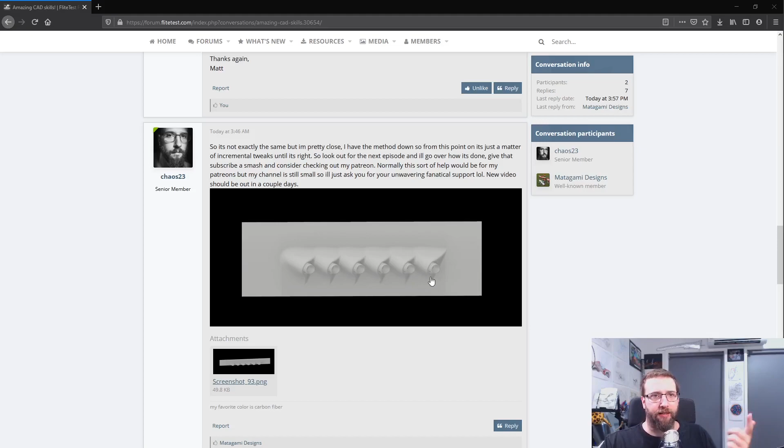Well, I wrote back to Matt, and I think I confused him. Well, he got 75% of it, so that was helpful. So I did some stuff and showed him how to go about it. It's not perfect, I can still see a number of things I still didn't even get right, but it was enough that he got it. Pretty close, it's the same as mine. It's not perfect, but it is a lot better than his first attempt, and that looks amazing. So, awesome work, Matt. That's fantastic.

So let's have a look at how we work out the shape of something from a picture, because it's not easy, and quite often the pictures we have aren't perfect for figuring out what we want. So how is it that you look at something and work out its shape? I haven't really explained much about this process. I've done lots of just showing you me getting dimensions of stuff, and that's easy enough. You just put the image there, you draw a line with the dimension on a thing that you know the dimension of, and then go from there.

You only use the dimensions of certain things in the image that are in the same plane of perspective and aren't parallaxed or lens blurred and stuff. Yeah, there's a lot to it, but it's pretty simple. But I haven't talked about finding shape, how to find geometry, how to find curves, how to work out and then take what you see and create a method for creating a shape in CAD.

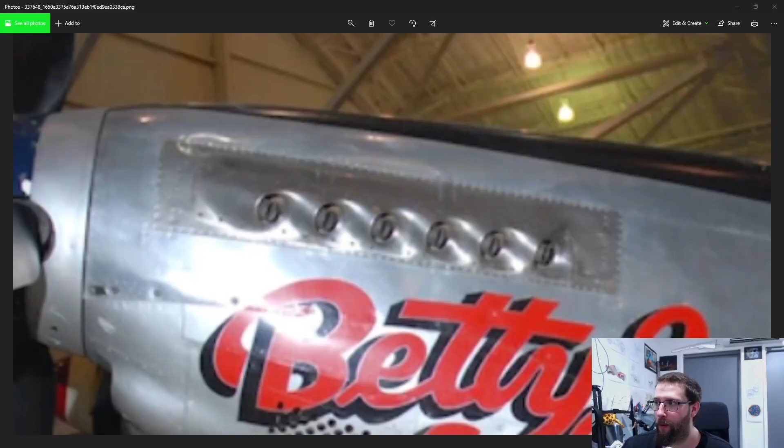CAD design, computer-aided design, is all about orders of operation. It's all about the method you use to approach the shape to get to what you want. And it's a big puzzle game, a bit like working out puzzles, and I love it. So I'm going to go through that with you and show you how I went about figuring out how to make that shape for Matt. Okie dokie, so let's have a look at this now.

When we want to find the shape of something, we need to look at certain identifiers, certain markers in an image that allow us to determine shape. The key things our brains look for when determining shape is light: how light plays off the object, where shadows fall, where highlights are, where things contrast. This delineates in our mind outlines and form, and from that our brain develops the three-dimensional geometry of those markers. So when we look at an image, even when it's blurry and zoomed in like this, we can still see quite a bit of information. We know from the rest of the shape of the aircraft that it's pretty flat.

We're looking straight on from it. There's very little play in the light, but we are seeing little spots of highlighted light from the lighting in the scene. So we know that the object we're looking at is fairly shiny, right? This is all simple stuff. But what shape is it?

Because this is all pretty flat and the color and the highlights don't appear much, we know that this is a pretty soft curve, a pretty flat face. It's not entirely flat because we can see the way that there are some lines up here, which means that it curves a bit more.

When lights play off of a curved surface, they generally make a line. When it's a cylindrical surface, it's a line. When it's a spherical surface where it has compound curves in two directions, it's usually a spot or a point, or you get a bit of a fuzzy little area, depending on the shininess of the material or the shape of the curve. How intense the curve is determines how fine the point is. The finer the point, the sharper the curve.

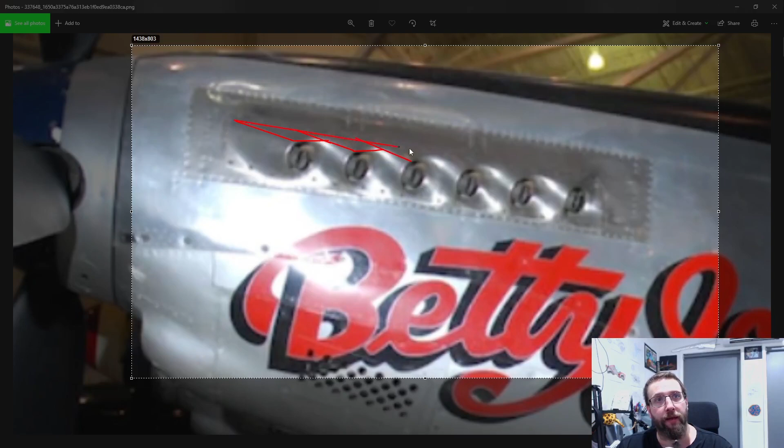So if we infer that that line continues, we can follow that line to the back, and then same to this one. We can follow from the front here, the apex of the curve, to here. We can then draw a line that tells us that there should be a delineation between this surface here on the tops of these pipes and the surface that meets and blends with the rest of the aircraft.

Other things that we can tell is that the same sort of thing is going on here. This crux of the corner in here, there seems to be - it's not quite a straight line, but you can infer that that's pretty much a straight line, which is a combination of the curve, the outside curve of this pipe here, and the inside curve of the opening here, which creates an S shape.

So from that, we can say, okay, one of these things is created with a repeating geometry of this sort of shape, this sort of like yin and yang, but with the fat ends touching, if that makes any sense. So this is the profile of the shape that we want. We don't really want the pipe as he had in his first attempt.

So now that we have the profile of this geometry, we then jump into Inventor. In Inventor, we need to get a few things set up.

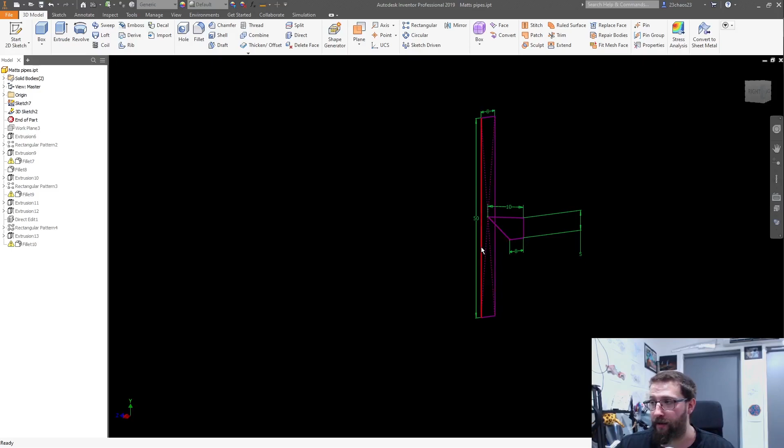First things first, we're going to create a sketch that's going to give us the surface of the aircraft. I've just made it a flat surface. The actual aircraft probably has a bit of a curve there, but to keep things simple, I just made a rectangle shape so that we can have a surface to play the aircraft, the pipes out of.

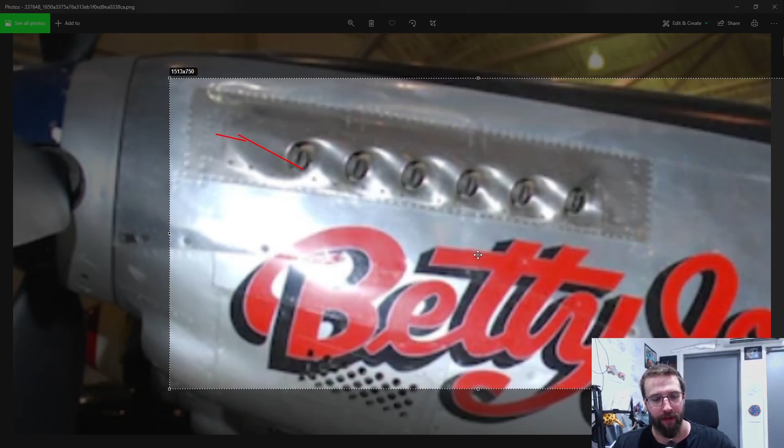Next thing we need to know is the angle that the pipes are coming out of it. If we look at those pipes, they are both coming out of the aircraft. This is one of the terms that Matt had some trouble with. I'm going to give you guys a bit of geometry jargon here.

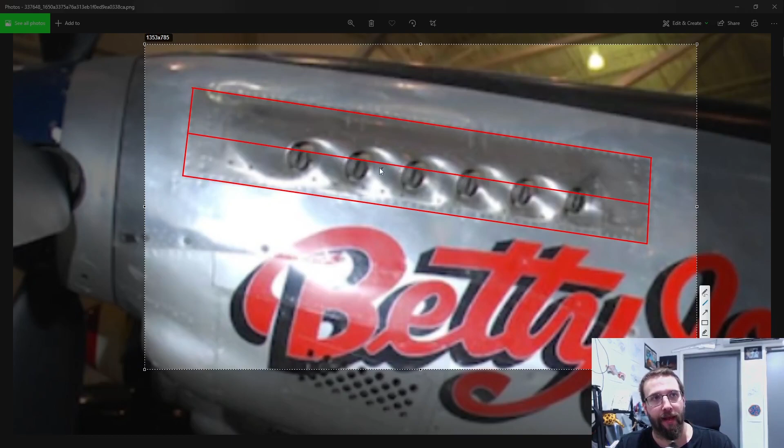If we say that this surface of the aircraft, this panel, if we draw a line down the middle of this, this line is called the longitudinal bisector. It's longitudinal because it runs the length of the rectangle, and it is a bisector because it cuts this section in half. Bisector.

So we can see that these pipes come down, and obviously they come out from the face of the aircraft. But we can see that this is actually a very shallow angle, and it's also because the length of this shape from where it sticks out to where it blends with the aircraft is quite long. We know that the angle at which it comes out from this bisector is also quite shallow. So it's a shallow down and a shallow out.

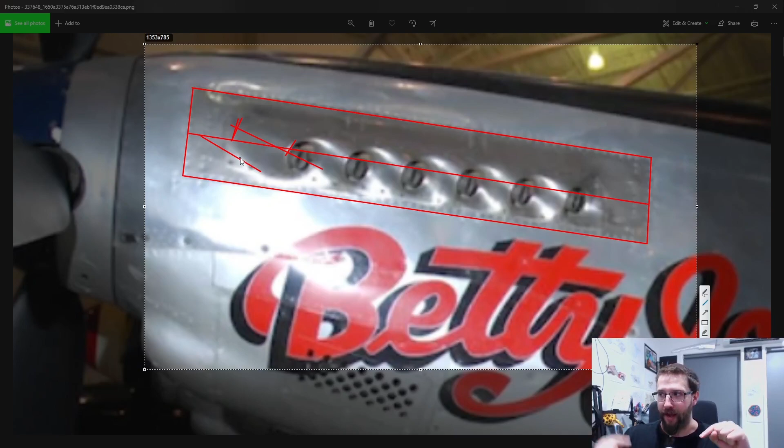So from that, I just created a quick three-dimensional sketch. And here it is. You can see it sticking off the center of this rectangle. So we have the distance that this angle is coming away from the surface, the distance it's going down, and the distance that it's coming out.

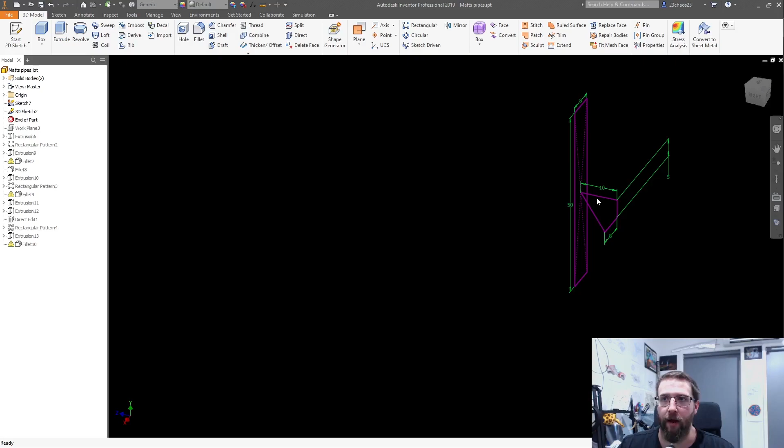You can do this with angles instead. I just did it with this because in 3D sketches it's easier to use the distances in the 3 directions rather than setting up the angular arc seconds for each of the lines in the 3 different planes of orientation. It gets confusing when you're using 3D sketches.

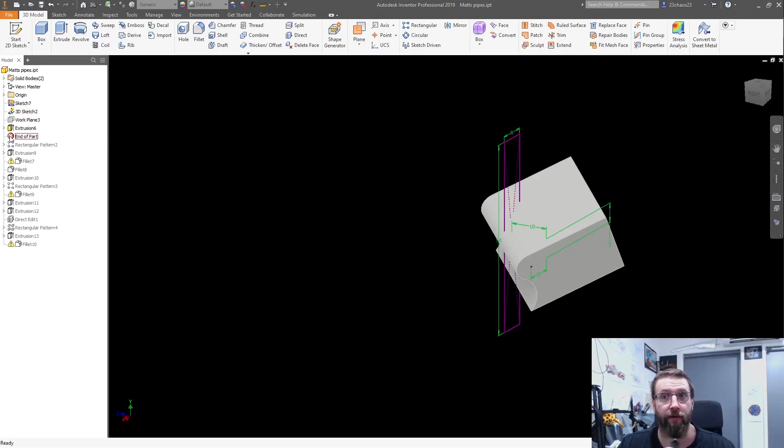Once you've got that, the next step is to create that shape. So you can see here I extended it going in further than I needed it, and you've got the outside curve of the pipe and the inside curve of the pipe.

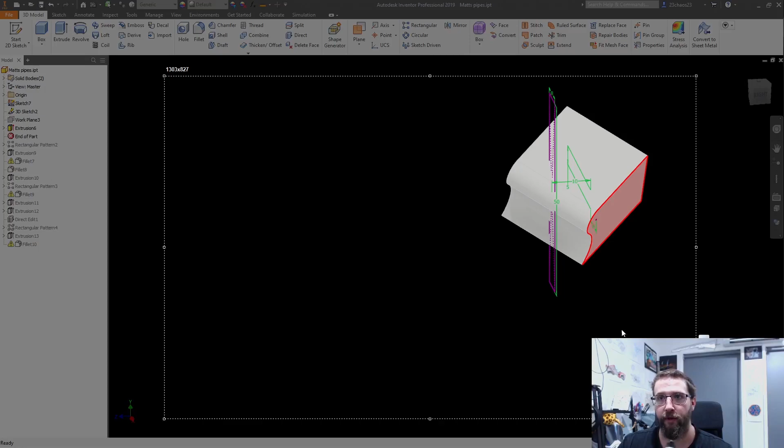Now you'll see that I've created it at a weird angle compared. It's not coming straight down with this rectangle, it's the other way. And this is because when you repeat this geometry along this axis, you want them to overlap in a certain way so that these faces meet.

So the thing that you're trying to match up is not this line here, this axis of this geometry with the face of this geometry you're going to create, but you want to line up this corner here with this corner here along the z-axis in this case.

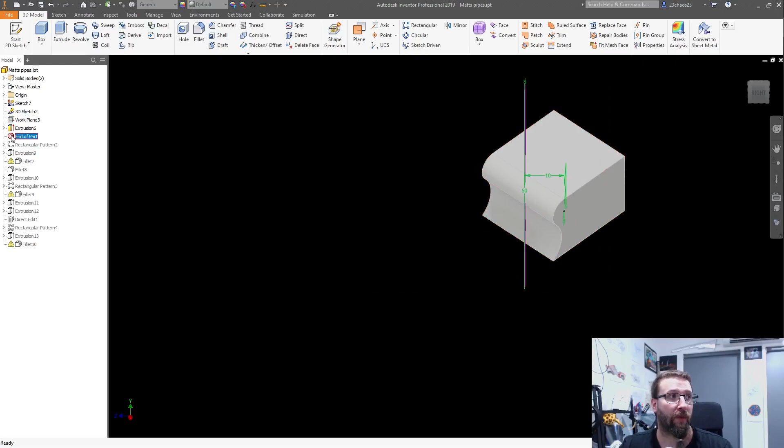Next up, you repeat your geometry and you see there how that makes now a nice flat plane. And then carrying on, creating the square, then we just use your fillet functions. Mine are broken because I was fiddling with it a bit more. But along down the ways, you get to a point where you end up with what you want.

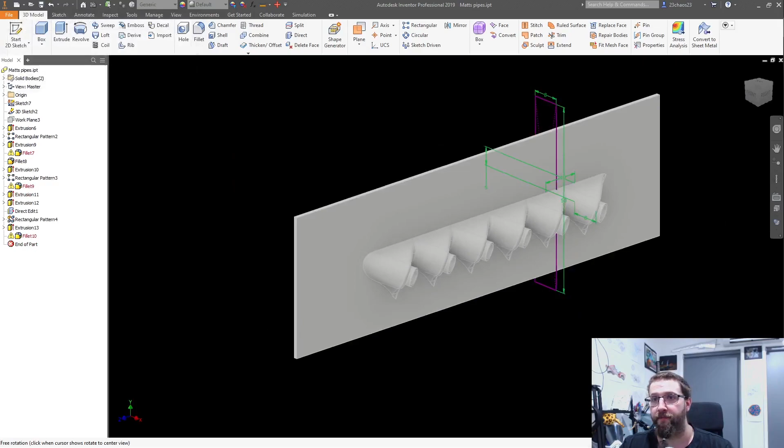And there it is. It's really simple. It's just a matter of looking at the shape that you want, figuring out, okay, how do I make this? And that comes down to, like I said, you look at the image and you need to work out your cross-sectional profiles of your shapes.

And that turned out to be that weird double teardrop, yin and yang smushed together sort of S-curve shape. There are some things that are still not quite exactly right, because if you follow this S-curve, it comes down and meets up with the geometry of the aircraft, and then it looks like it comes and scoops into it. Whereas what both of us have done, there is no scoop there.

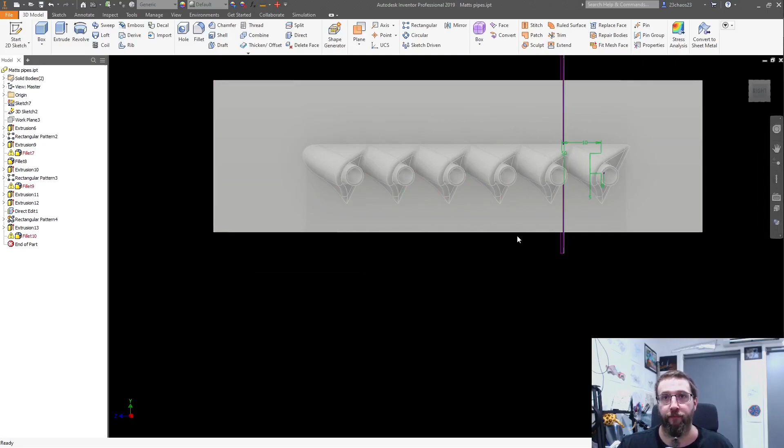That S-curve comes and it meets up at the back here rather than at the front here. So to make this better, I would bring this face further out, and then you create another piece of geometry that was like the one that we created to create this repeated geometry, but you do a negative of it flipped around so that it ends up creating a scoop out here, just a very small one on each one of these profiles, and I think just a little bit on this one.

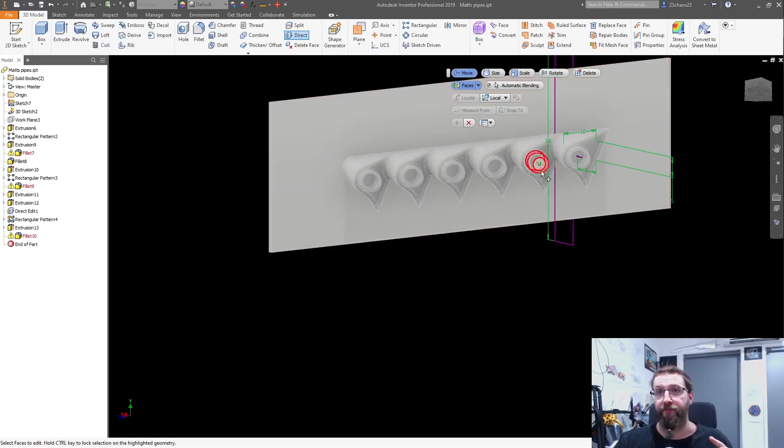This one and this one, the ones on the ends, are a bit different to the repeated geometry in the middle because they're the ends, so their geometry changes slightly and becomes the exception to the geometry you're trying to create. If I wasn't being lazy and just trying to do this quickly, I would have created a repeated geometry for these center four in the middle, and the ones on the end I would have created in a similar way but slightly different, so the one blends to the end on that side, and the other blends to that one on that side.

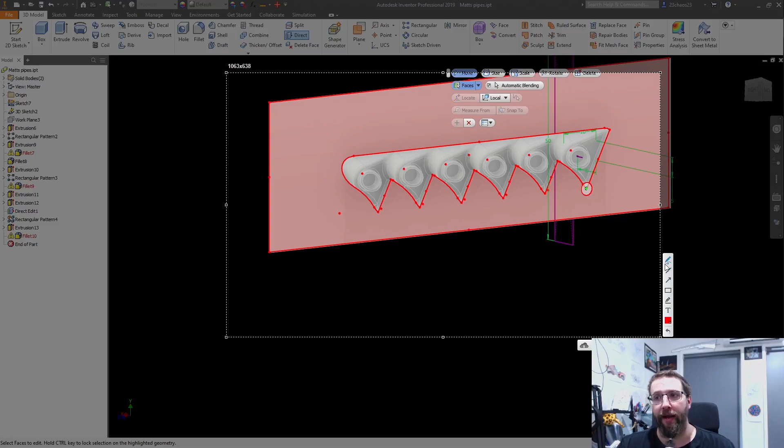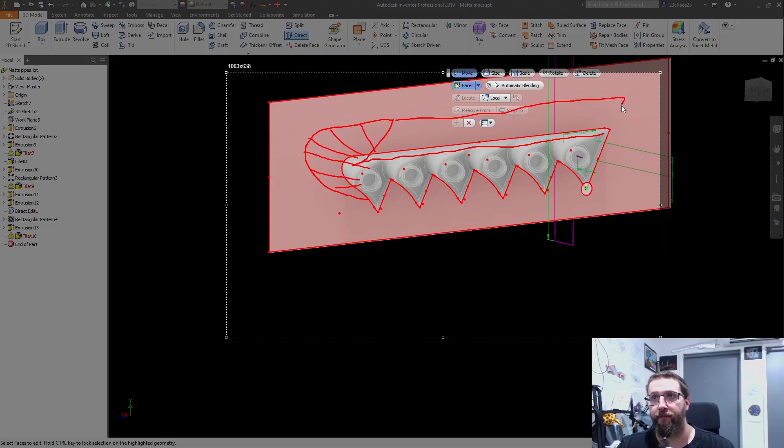Because if we look at the image, there was more of a blend coming off this back one, where it sloped more up like this, and the curve it created was sort of like that shape. We're missing this profile that was on it, and it would have continued like so to that point there, with a fillet that made that sort of shape. That's what we're missing.

So the method to create this is on the right track, this is the right way to go about it. It all depends on how much time and effort you want to spend making tweaks and adjustments and fine details to tune it in so it's exactly right. And this is good enough. For FDM printing, the amount of detail you lose pretty much means this is your maximum level of detail. There's not much point going further than this, because you're going to lose detail in the manufacturing process anyway, so you're wasting your time.

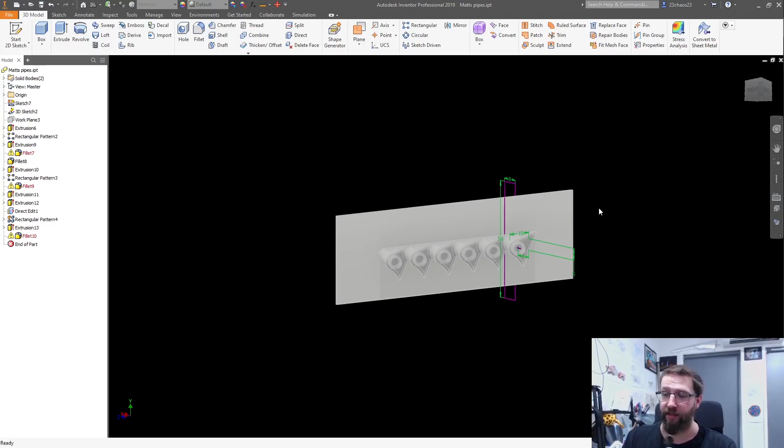And there you have it. It's not the best explanation in the world because I'm trying to keep things general. There are so many exceptions to rules, so many other little nuances to this kind of skill that I can't really get across in any reasonable video. It's something you learn over years of practice and trying things. Hopefully that was helpful, and it lets you look at your reference imagery and develop your shapes and geometry better. This will improve the look of your models.

Keep in mind, whenever you're doing something, lay out your design criteria at the beginning, your parameters. You have to look at what your manufacturing process is, and what the limitations of your design parameters are. That way you're not wasting time putting extra fine detail into something only for it to not show up, or end up adversely affecting the surface finish of your product.

With FDM printing, it's a win-lose situation. You get to be a bit more lazy, you don't have to put as much detail in because there's only a certain limitation on the detail you can print. In my case, I'm using a resin printer, so I kind of have to go full balls with that detail. I don't get to say that's the limit of the manufacturing process - no, it'll do 5 microns, so that means rivets, screw heads, everything, I'm going to have to do it. It's going to drive me crazy. Yeah, so hopefully that was helpful.

Before I go, let's jump into Inventor again and I'll show you where I'm at with the Draco build. I've gone quite a bit further, so let's go have a look at that. Oh yeah, this turkey's got some legs now. Isn't that cool? Let's just go over some things I've noticed in getting these legs done.

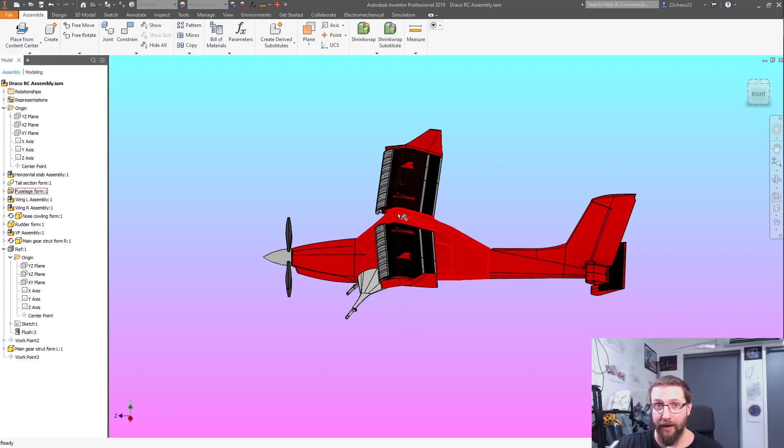Things I'm not happy with, which will ultimately lead to me redoing 90% of what you see - minus the wings, the wings are cool, I'm happy with the wings, the elevator's cool. Things I still need to change.

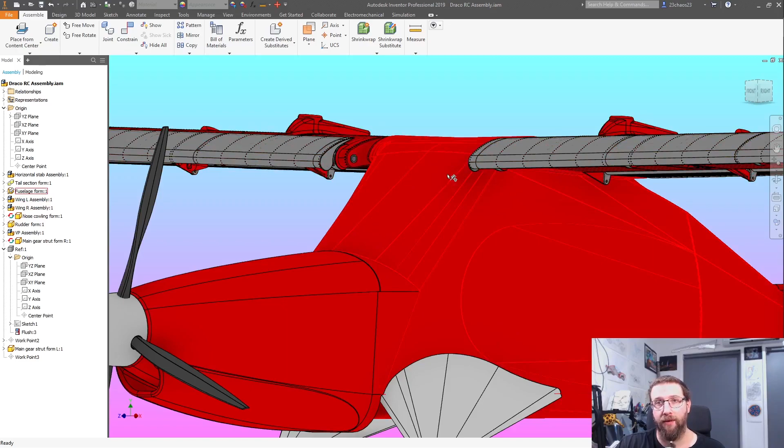Well, if you look at it head on, she's a bit skinny, and I think there's a couple of things that play into this. I think it comes down to the dimensions I got for the height of the windshield - raising the front end up here to where the wings meet is a little too high, I think it needs to come down maybe half a thickness of the wing. Another thing playing into it is the lower end of the front cowling.

I think I have it coming a little too far down, scooping out here at the bottom, because it does this in the real aircraft.

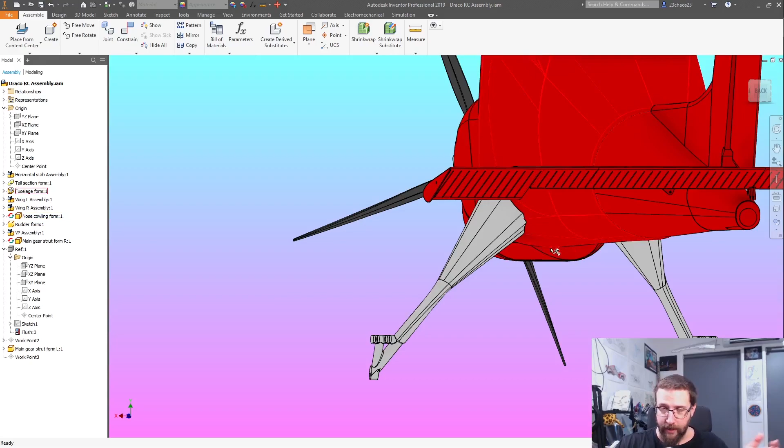This is the venting zone for the engine area, not the exhaust, just the cooling vent, so a number of radiators and stuff were in here, and this is where the airflow would have exhausted out. The cowling in general is pretty close.

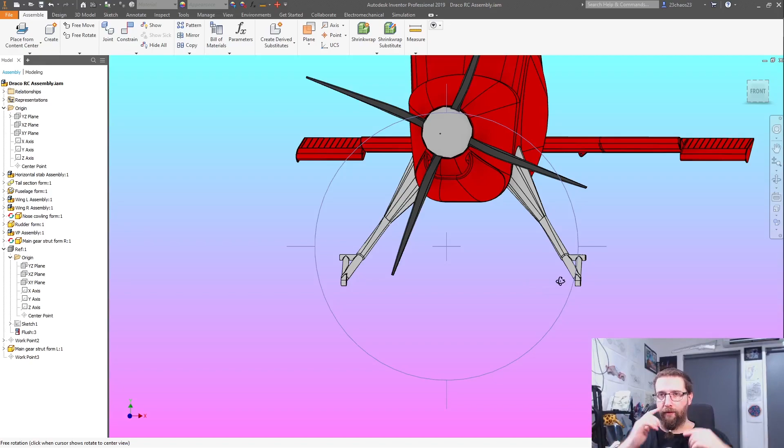I'm not 100% happy with it. There are things that could be done differently. The legs are pretty close, but I don't think I have them spread out as much as they should be, and I think this is due in part to how narrow it looks with the longer windshield, so it's throwing me off on how they should look.

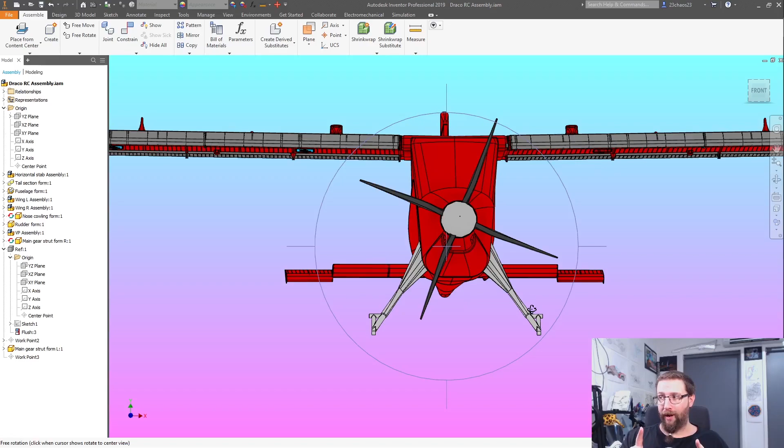Also, the reference imagery I have for this is mostly from before he did the suspension, and I think it widened out just a little bit after the suspension upgrade. I'm not 100% sure, but from the measurements I can pull off certain drawings, there was about a 5% increase in the distance between here and here. So I'm not 100% sure.

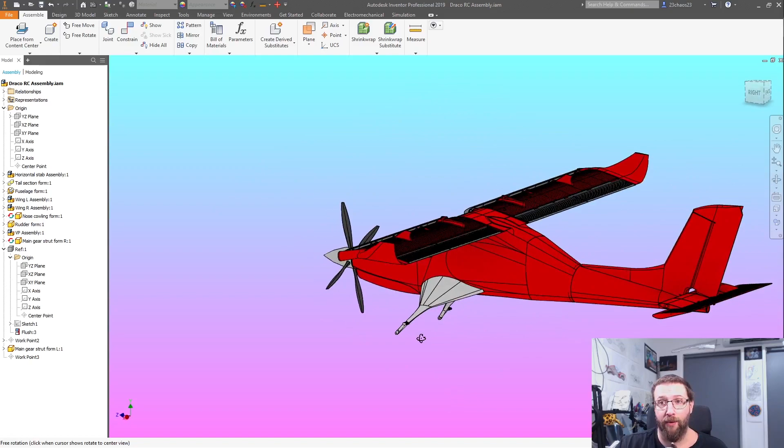But she has legs now, and it's starting to really look like the Draco. I'm quite happy with it. It's getting there. I'm going to keep tweaking and playing with these fuselage sections.

The tail I still have to come in on. Oh, by the way, I made the rudder. Hi, rudder. So I still need to change the shape of the vertical stabilizer for the rudder so that they blend together.

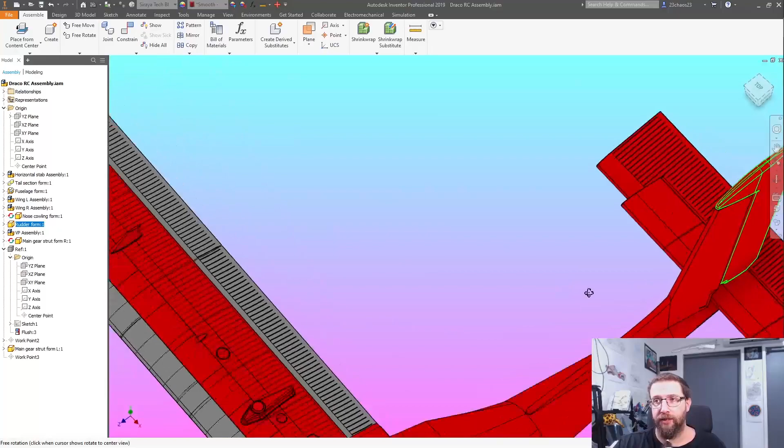I adjusted the thickness of that curve, so now it looks a lot closer, but I need to create a sloping curve from the front edge to that so it all has a nice aerofoil shape, because at the moment that's a flat surface, and that's not what we want.

I've got to make a heap of tweaks to the main fuselage shape. I'm going to change a whole bunch of stuff, which means I'll have to change this and this too because they all blend to it, and these objects are created from this object, so changing this means these aren't going to fit anymore, and I'll have to do it again. It's just going to drive me mad.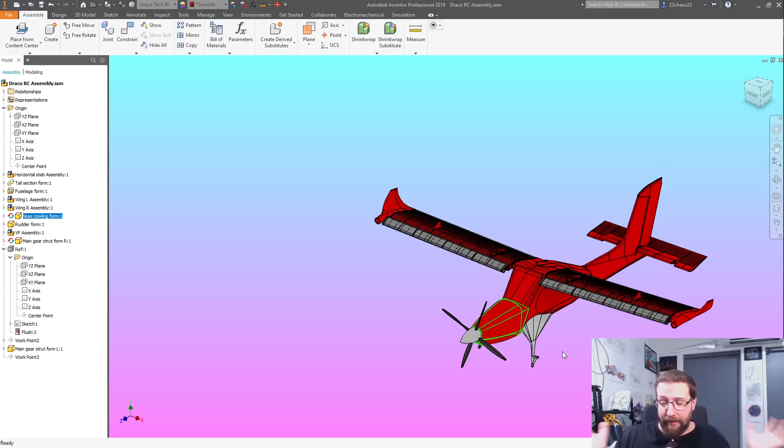So this is going to take a while. This is going to be the slow and difficult part of the project, doing all these little tweaks to the general shape until it looks right. It's a lot of going back and forth, redoing stuff, and when you change one thing, you have to change another because they're touching and they have to blend. Oh my god.

But I'll get through it. It's fine, it's fine, I'll do it. It's alright. Yep. So, a bit of a weird episode today.

Hopefully I taught you a thing, you learned a thing, hopefully, I don't know. Nobody gave me an instruction manual to any of this stuff. You do have to figure it out over years of practice. Hopefully you guys are picking up a few of the things I'm putting down, and hopefully that helps you make better CAD models and more awesome stuff. And yeah, I'm gonna get back to work.

I have so much work to do. This plane is not going to finish itself. That's the only problem with this kind of work, it doesn't do it itself. One day I can just ask the AI to do it for me, and then yell at the AI for getting it wrong, and then have to do it myself anyways.